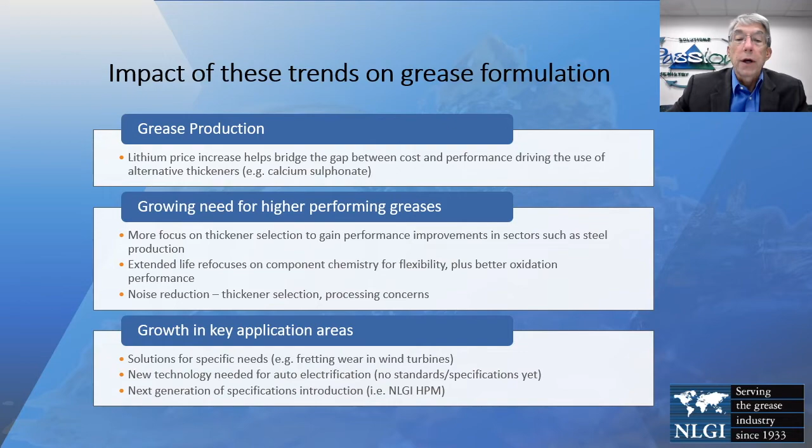So if we look at the high performance multi-use grease specification, again HPM for short, our overall goal was to define these new specification categories for higher performance for the market, and increase the communication between the end user and the grease marketer or manufacturer. So try and understand the needs of the market and come up with specifications that would allow a grease manufacturer to communicate to the end user what that grease was capable of doing, and also give some assurance around its performance.

So to do that, we defined greases with a core HPM specification and then subcategories for enhanced performance in different areas. And we'll talk about each of these areas: water resistance, high load carrying capacity, saltwater corrosion resistance, low temperature performance, and potentially high temperature or long life. And those are still under discussion. I'll talk more about those in a little bit. But each of these enhanced categories has to also meet the core HPM performance as well.

So the idea overall here again is to be able to talk to an end user who perhaps has needs for saltwater corrosion resistance for a lubrication aspect, and be able to then show him the enhanced performance and kind of certify or assure that performance through NLGI's specification.

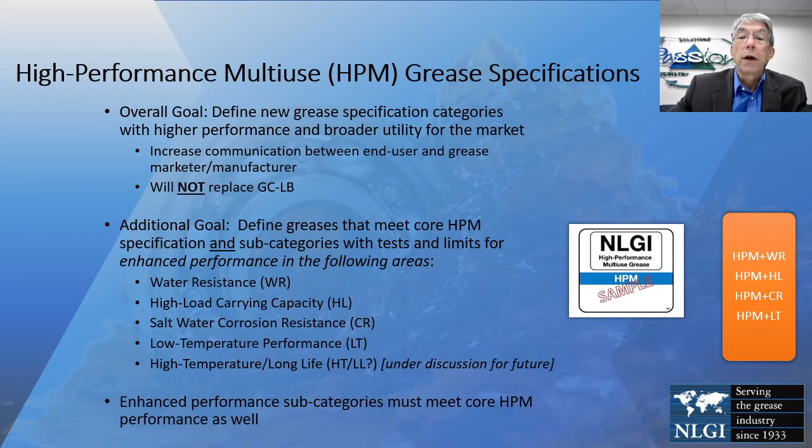So historically, NLGI specifications: in 1966, there were some initial discussions between NLGI, ASTM, which is the standards body, and SAE, the Society of Automotive Engineers. They all essentially got together in 1966 to talk about the needs for the automotive industry for defining specifications around lubricating greases. In 1989, 23 years later, they published the ASTM standard D4950, which outlines the specifications and classifications for those service greases for chassis and wheel bearing greases. And that's what we call today the GCLB specification.

In 2015, we looked at GCLB. This is the only set of specifications that NLGI had to this point, and it's still hugely popular, even though almost none of the automotive industry is actually still using GCLB as a specification for automotive greases. The industry and manufacturers tend to look at these greases as a sign of premium performance. It has an NLGI stamp on it, and it's certified against certain standards, so it's obviously very popular. But when we looked at that, we said, look, it has to evolve. We need to raise that performance level to meet the performance levels of the higher performing equipment and some of the trends that we talked about earlier.

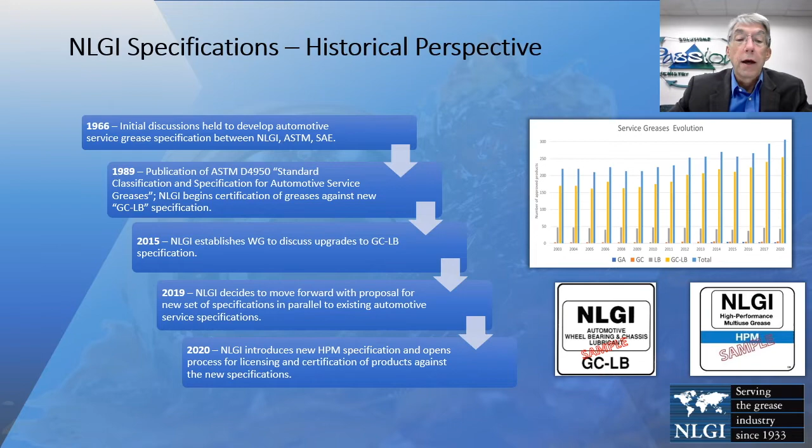All right, so just as an overview, we've got the high performance multi-use core spec that we'll talk about. And then on top of that, you can claim enhanced performance in one or more of 4 different areas: enhanced corrosion resistance, enhanced low temperature, enhanced water resistance, and enhanced high load carrying capacity. Those are each on top of the high performance core performance. In some cases, we've just pushed the performance level in a certain bench test higher. In other areas, we've added additional tests. And for a particular application, if you see a market need, you could claim one or more of these enhanced tags on a specific grease.

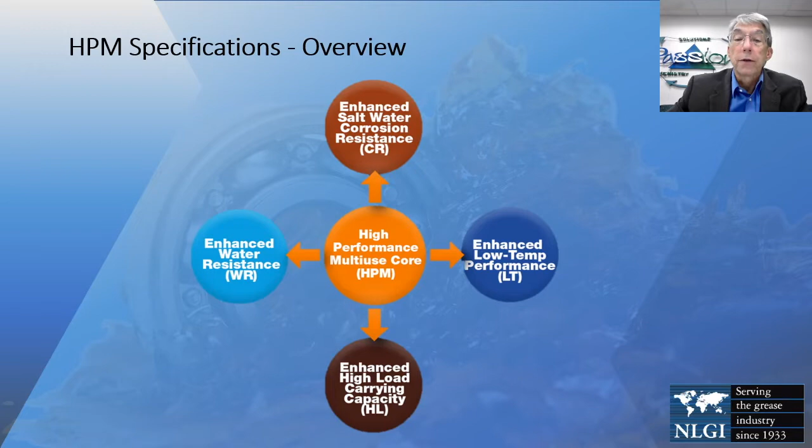All right, so the core specification itself, this is the core spec right here, and we have the same penetration range, from an NLGI 1 to a range number 3. Rust protection, we've got both the static bearing test and the dynamic bearing test. We've included and kept the 4-ball wear and 4-ball weld testing. Added the oxidative stability test, the D942, the pressurized vessel. Copper corrosion is included. We have an elastomer that is an NBR material specified by ISO 13226, tested for 168 hours at 125 degrees C. All of these specifications came from discussion with industry stakeholders, manufacturers, OEMs, and partners within NLGI to come up with these tests and these limits.

Included for stability, we look at prolonged worked penetration, water washout, high temperature bleed, roll stability, oil separation, and then low temperature torque with a ball bearing. So this is the core performance meant to define a high quality multi-use grease. It's not going to be the best grease out there, but it should meet that level of quality for a specified application.

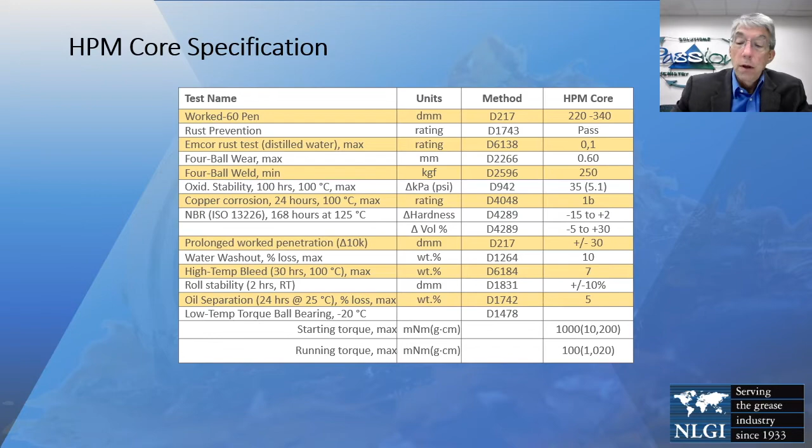Now, if we look at how this compares to GCLB, I've tried to highlight areas where we have the HPM core tests, and you can see in some of these areas we've kept the same limits, so the wear is the same, but the weld is increased. We think 250 weld should be fairly easy to meet and should be a minimum standard for a high performance grease. We have left out things like LWI, fretting protection, dropping point, and high temp life, which we don't think were needed for a multi-use grease, but some of these may be included in some of the enhanced performance tags. Oxidative stability is included with the pressure vessel, and copper corrosion. Both of these were not included in GCLB. The elastomers we talked a little bit about.

Elastomers in general, these are the elastomers that were chosen because of the automotive industry. We believe the NBR ISO material here will be more readily available and is not going to be changed as frequently as the automotive industry seemed to change the materials we use in GC-LB.

We also wanted to add stability testing like the prolonged worked penetration. Water washout, we wanted to increase the severity of that specification there. High temperature bleed is included, and roll stability is included, which were not in GC-LB. The limit for oil separation is reduced slightly, and leakage is not included in the HPM core.

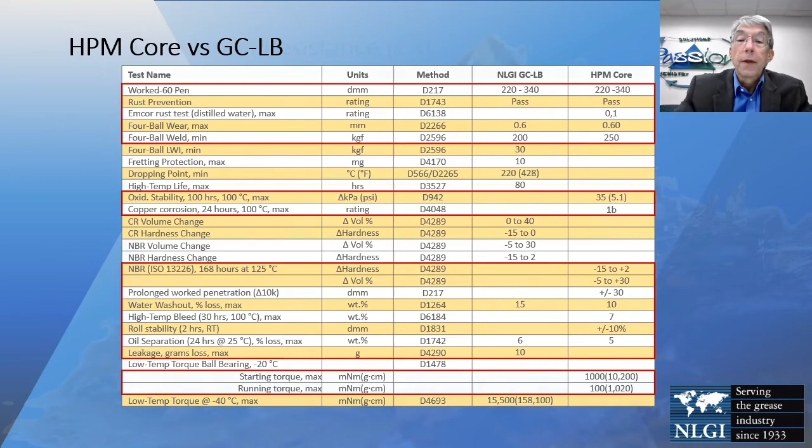If we look at each of the enhanced tags, so again, HPM core, if you're going to claim an enhanced tag, such as corrosion resistance, you still need to meet all of the HPM core tests, and then the enhanced category is going to include, in this case, the static bearing test, but with 10% synthetic seawater. That needs to pass, and then 2 different saltwater solutions for the EMCOR test. And this is 100% synthetic seawater and 0.5 normal sodium chloride solution.

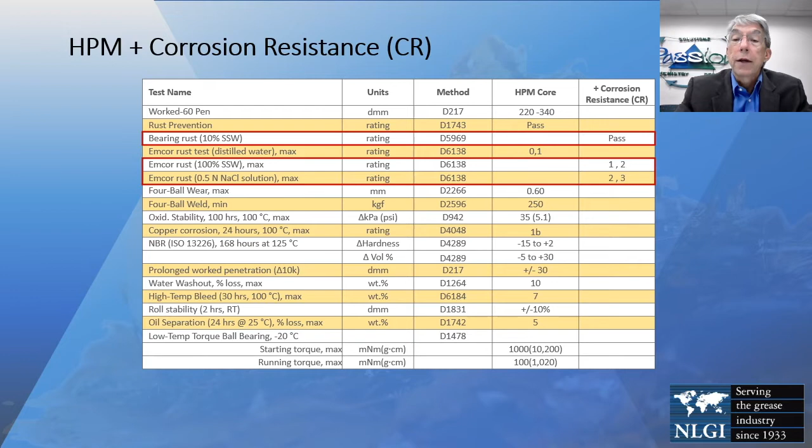And in these cases, you'll see these are always run in duplicate, so in this case we have a 1,2. That means you could have one bearing that's rated a 2, but the other one must be a 1 or better. And the same thing here, we have a 2,3. So those are the enhanced performance needed for a corrosion resistance enhanced tag, and that is again on top of the HPM core.

If we look at the high load, this obviously focuses on some of the EP type testing and wear testing. We've lowered the wear specification from 0.6 to 0.5. The 4-ball weld is increased to 400. And we've included 3 new tests here. In this case, the SRV step load, that's ASTM D5706, and that's at a level of 800 for a pass. 5 milligrams of weight loss in a duplicate testing of D4170.

So D4170 right now has some industry issues. We're working on those issues and trying to improve the repeatability of that test in general. But for now, it's included in the spec at 5 milligrams, and that is the average, again, of 2 runs. So 2 runs are required.

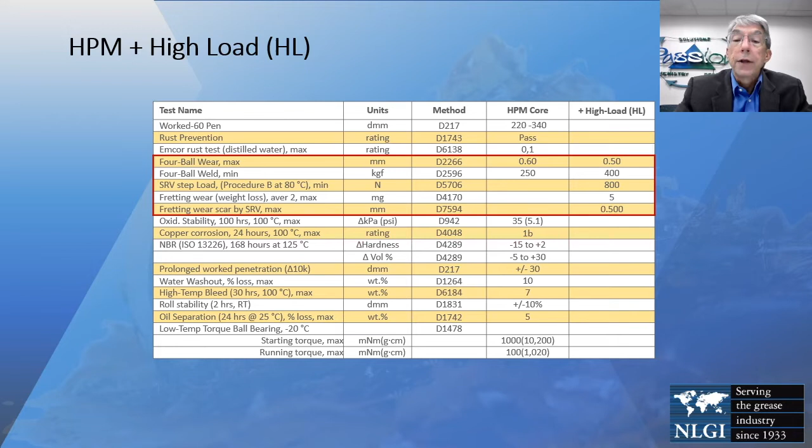We've also included a new test here, the fretting wear scar by SRV, and this is ASTM D7594, and that is a 0.5 maximum for that wear scar. So again, those are the enhanced categories needed on top of the HPM core for the high load carrying capacity tag.

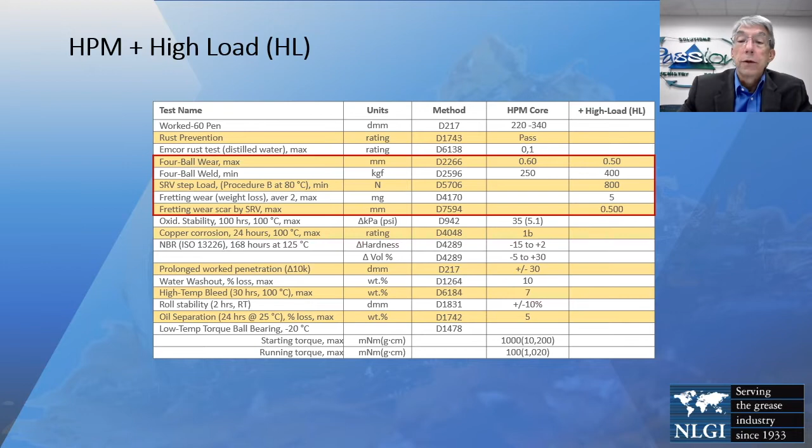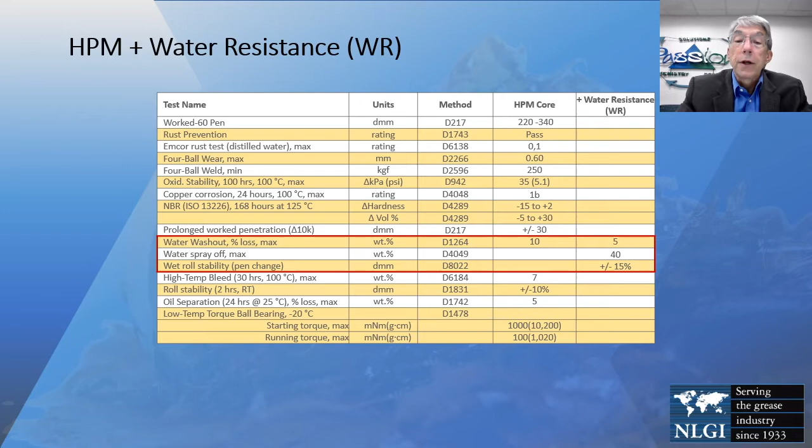For water resistance, on top of the HPM core, we've included a more severe water washout specification limit of 5. The water spray-off test is included with 40% maximum, and the wet roll stability is included here with a plus or minus 15%. So those, again, are enhanced performance category tests for the water resistance performance tag.

And for low temperature, we've included 3 low temperature tests on top of the core testing, and this is the low temp ball bearing at minus 30 instead of minus 20. So the core testing requires minus 20. For the low temperature, we require minus 30, but the same limits at minus 30. We've also included the US Steel mobility test at minus 20.

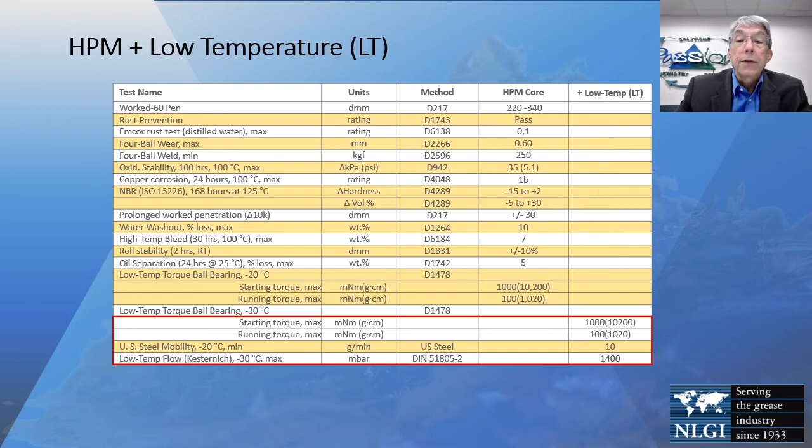And that's a flow mobility test, and that's going to be a minimum of 10 grams per minute. And the low temperature flow Kesternich test at minus 30, and that needs to be at maximum of 1400 millibars. So that, again, is the enhanced performance for the low temperature category.

All right, so we did do this pretty much in record time for NLGI. We got this out there in a little over a year and a half, I'd say, and this is pretty much in the middle of a pandemic and everything else. This was great work by all of the stakeholders in the industry. These are NLGI members, OEMs, grease manufacturers and marketers, additive suppliers, equipment makers.

We went through a pretty intensive interview process, had meetings to pull people together to understand their needs and their concerns, and out of all of that, in December of 2020, we were able to launch this specification.

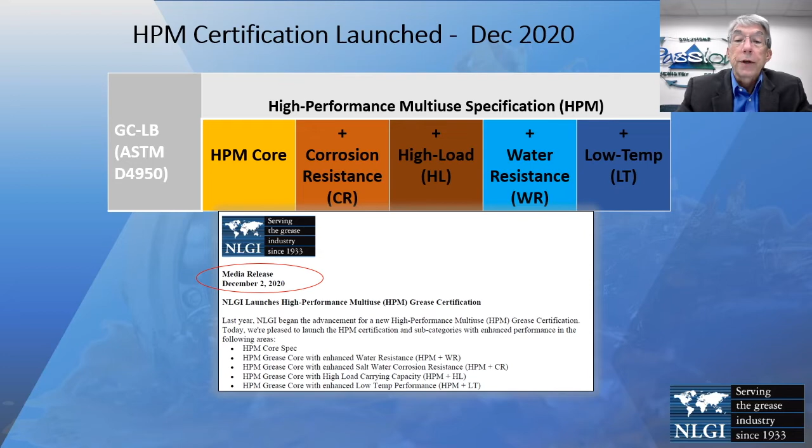So NLGI is working with the Center for Quality Assurance, CQA, to help administer this program. This is a little bit different from GCLB in that there is more actual testing and certification of samples to help assure the quality of the greases that are using the HPM label.

The website is now live. We've got the website included here. I'm sure these slides will be available, but I'll also show you on the NLGI website how to access that if you'd like. CQA will collect samples, and they will carry out testing as part of the certification and audit program to help support HPM.

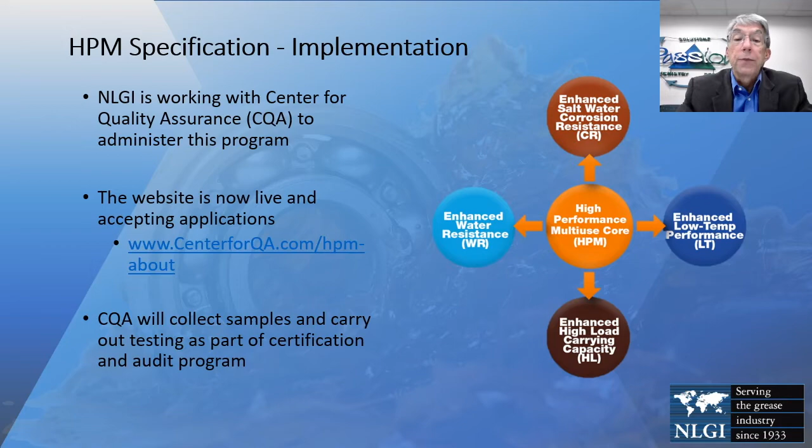So currently, in our implementation, we have 9 qualification samples that have been received. We have 5 in the testing phase, and we have our first HPM certified product just as of last week, I believe. I don't think it has been announced yet who has that product, but I'm sure that will be forthcoming in the near future.

We estimate probably 15 to 20 HPM products will be registered by this coming fall, and I assume that those early adopters then will be advertising out in the marketplace, and that may drive others, but also we want to see some of the OEMs adopt these specifications to better help them communicate their needs to the industry.

There is a pretty extensive FAQ, frequently asked questions, collection on the CQA website, and this is all available to the public. A lot of the questions that you may have, there's some ready answers there already. And over the last year, we started last fall and carried this on through the spring, a webinar series that focuses on the individual tests that are included in the HPM spec.

So these webinars are now available on the NLGI website in the members only area, and you can access those webinars at your leisure. If you have questions, or if you have new people in the lab that are not sure how to run a test and want some additional information, that's a great place to get that information.

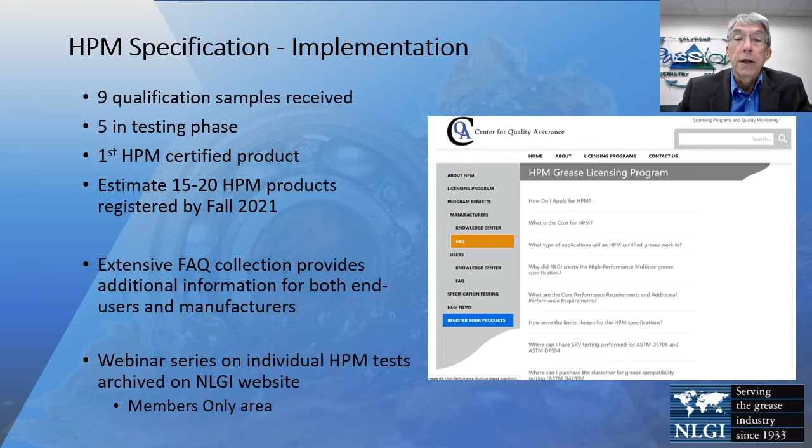As I said, CQA is helping us with the certification process, but basically to register the product, you submit the application paperwork along with product data, so a set of data showing that your formulation meets the HPM spec, and then you would submit a sample for confirmation testing by CQA, and then submit the licensing agreement and payment to them, and they will take care of the rest of that paperwork.

So that's all pretty much available on the CQA website, all of the steps on how to do that. This is just kind of a big picture overview of that, but the CQA website will have all that additional information on there.

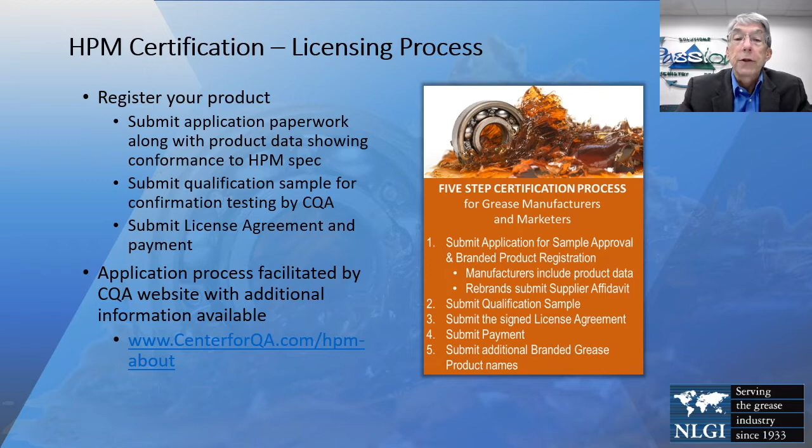So we do have more information, as I said, on the NLGI website, nlgi.org. There is a whole area set up for the high-performance multi-use grease specification. If you go to that site, you will get information on the webinars. So you'll see all of those archived webinars that we talked about, and webinars such as this one will be archived on there, so you can see some of the previous conversations that we've had around the specification as well, if you're interested.

The specification itself, so the details and the testing that I just talked about today. I think there's also a list of some test labs that are available to run those tests if you don't have them in your own lab. And the most recent specification details are included on there as well.

You'll see historical information, so press releases, articles in various trade magazines, marketing information, some of the timeline and background that I've shown here today. That kind of information is all available under here.

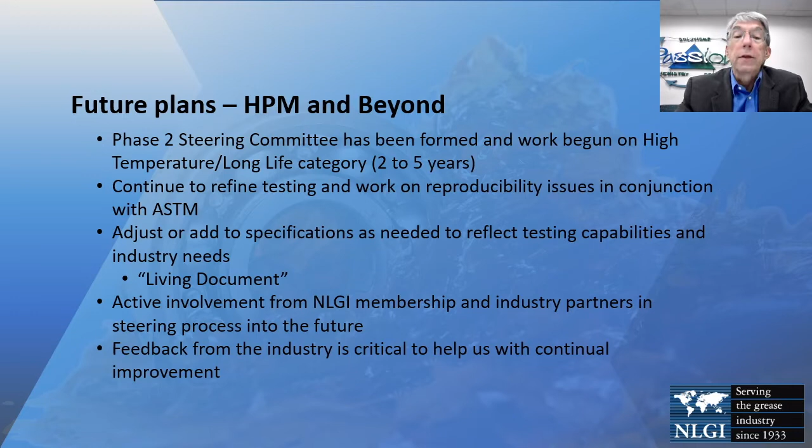We have a lot of active involvement from NLGI and our industry partners in steering this, and we really appreciate feedback from yourselves. We appreciate understanding what end users are looking for, maybe any criticisms that you have or suggestions for continuing to improve this. We would be happy to hear that. It would be good to get feedback from yourselves. What you think about this, how useful you think it may be, and what might make it more useful.